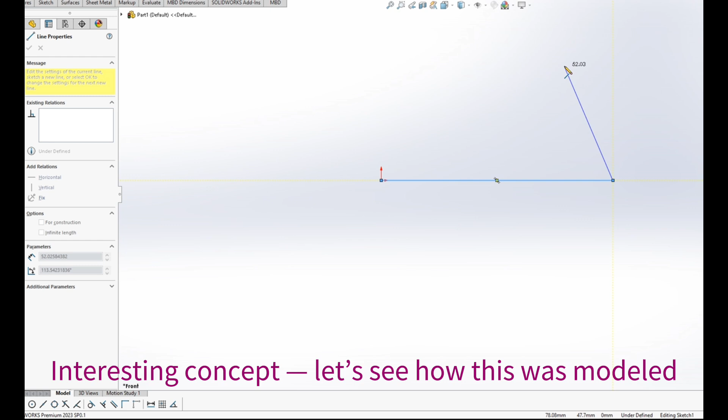Today, I've got something that'll mess with your mind, a SolidWorks model that looks logically impossible, but is completely real. Yes, you're seeing this right, it's an impossible triangle illusion brought to life with nothing but geometry, color, and some SolidWorks magic. At first glance, it looks like one of those mind-bending optical illusions from the internet, you know, the ones that make you question reality.

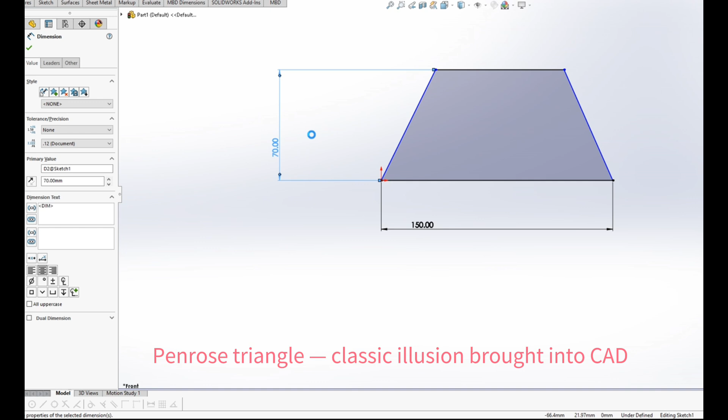But what makes this one special? It's not Photoshop. It's not a trick of lighting. It's a real 3D model that exists, just not in the way your brain expects. Let's break it down. This design is based on the Penrose triangle, also known as the Impossible Triangle, a shape that defies logic and perspective.

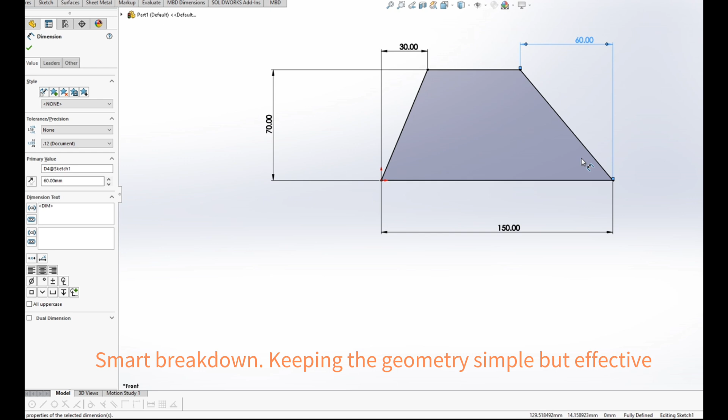In reality, such a triangle cannot physically exist in 3D space, unless you know the secret. It's all about alignment and viewpoint. From the right angle, your brain connects disjointed parts and assumes continuity where there is none. And that's what I recreated in SolidWorks, a perfect visual lie.

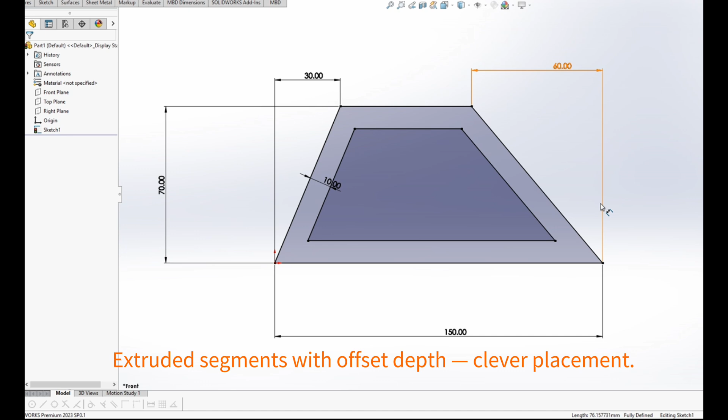So, how did I do it? I started by sketching a triangular frame, basic stuff. Then, I extruded the arms individually to form thick segments. But here's where it gets interesting. Instead of connecting all three corners, I separated the pieces and placed them in 3D space at different depths and angles. What seems connected from the front view is actually disconnected when seen from any other angle.

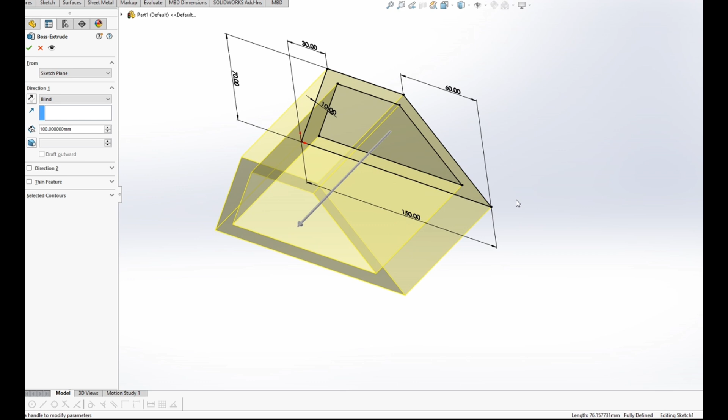Using reference planes, construction lines, and lots of camera angle testing, I slowly tweaked each segment until the illusion locked in place. You have to constantly switch to perspective view and rotate around to ensure that everything aligns visually, even if it's totally broken geometrically. It's kind of like fooling your own software into letting you lie to the viewer.

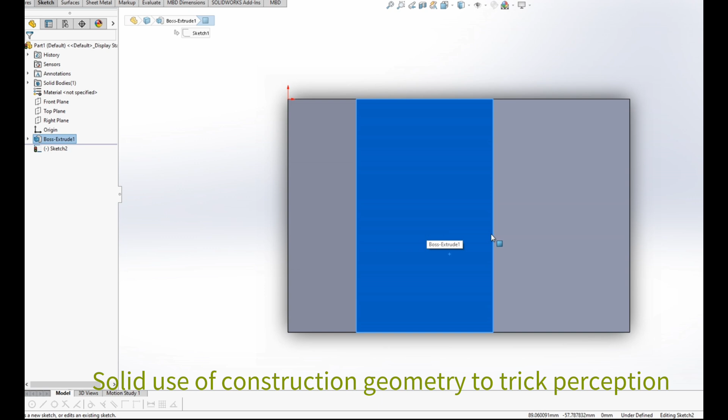Now let's talk about the colors. Every face is intentionally painted in a different color, not just for aesthetic, but to help the eye distinguish edges and create that pop that enhances the illusion. The use of bold, high-contrast shades helps emphasize each segment, and the sharp boundaries confuse the viewer's depth perception. It's almost like turning CAD into visual psychology.

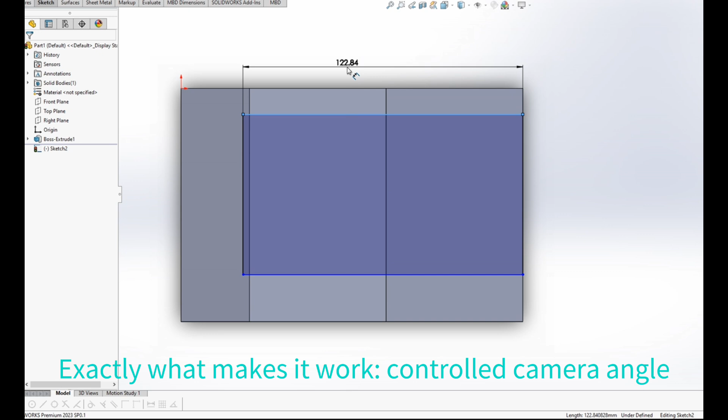From a technical standpoint, the model is simple, no advanced features, no surfacing or complex mates. Just basic extrusion, smart alignment, and a keen eye for angles. That's the beauty of it. Even with basic tools, you can create high-impact designs when you think outside the box, or in this case, outside the triangle. But why build something like this?

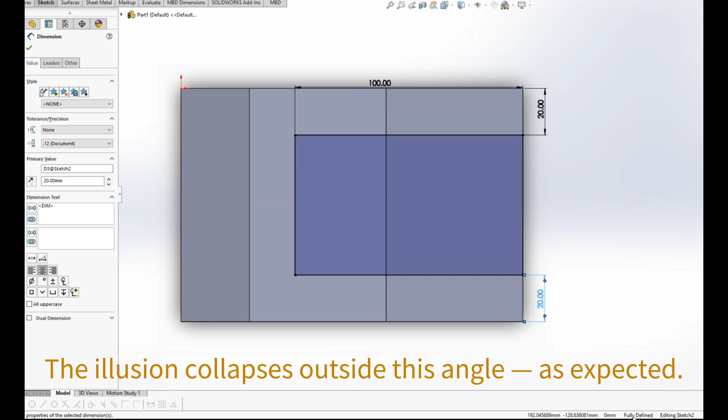Because design isn't just about machines and blueprints. It's about creativity. It's about playing with perception, challenging logic, and creating something that makes people stop and think. This project is a perfect mix of engineering, art, and curiosity. And SolidWorks gives us the perfect playground to bring those ideas into reality.

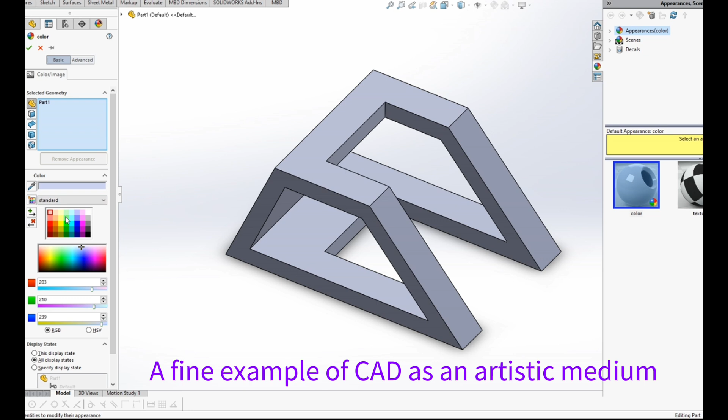If you're learning computer-aided design, I highly recommend trying something like this. It sharpens your spatial thinking, improves your modeling precision, and it's incredibly satisfying when you finally align everything and see the illusion form in front of you. And trust me, when you rotate the camera just slightly and the illusion breaks, it's even cooler. So, that's it. A 3D model that doesn't make sense, yet exists. All done in SolidWorks.